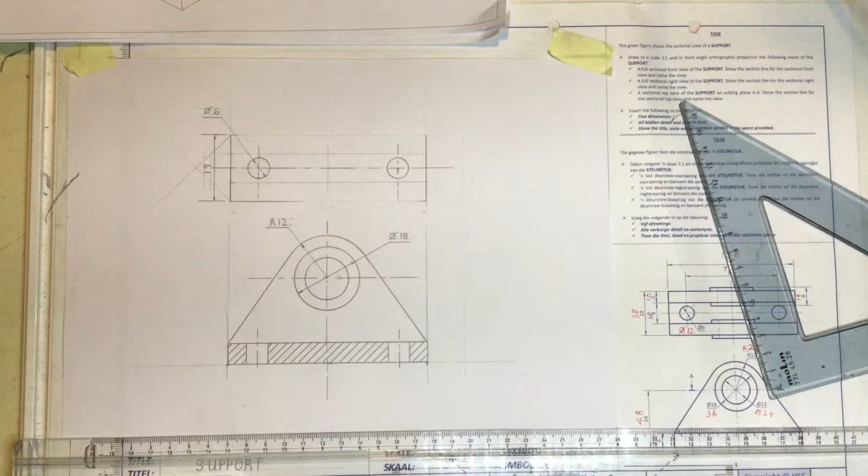Right, part two of this drawing. It's this drawing over here, 610. Just looking at all these views. So far I've drawn the sectional front view. That is completed. I can actually come up here and I can tick it off that I have done that.

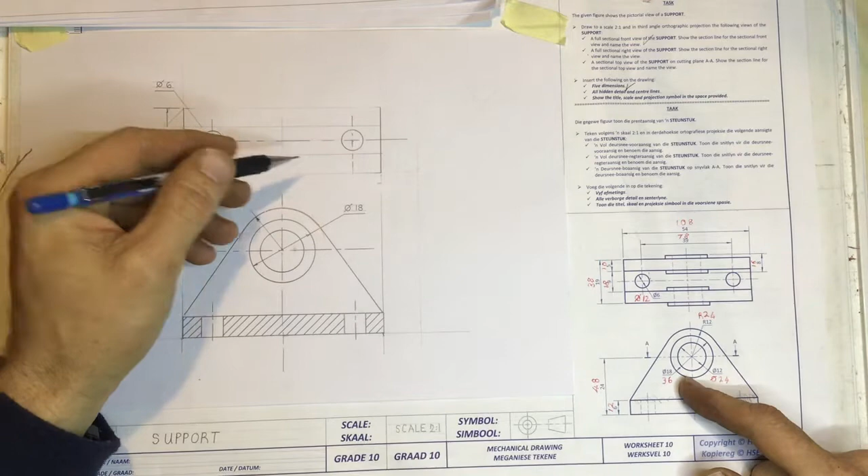I said that I'd done 5 dimensions. I've actually rubbed one out because I drew it a little bit too close over there. I'm going to redo that one somewhere else on the drawing. Okay, what I've also done is I've rubbed out that line and I've rubbed out that line just to make it into a construction line.

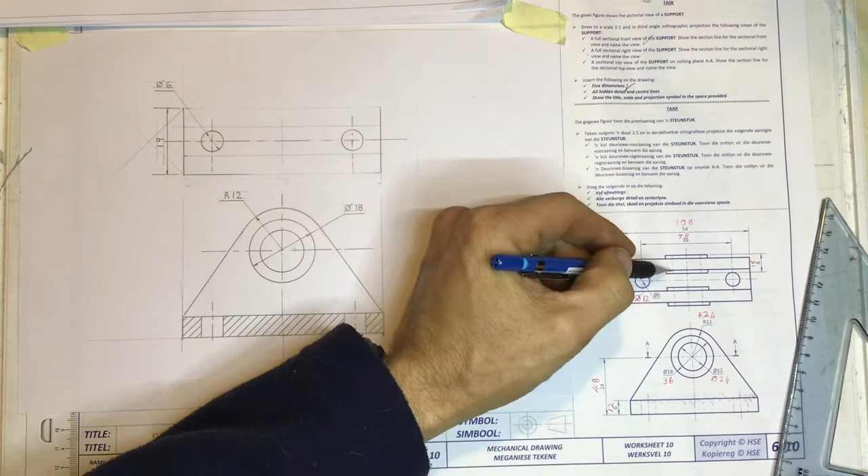The reason being is that we need to look at what this view is going to look like when I section it. Now, you'll see over here on the drawing that these little bits of this sort of bearing stick out over here on that side and that side and that side and that side. You can see the hole as the hidden detail going through it. Now, what does that look like when I cut through it?

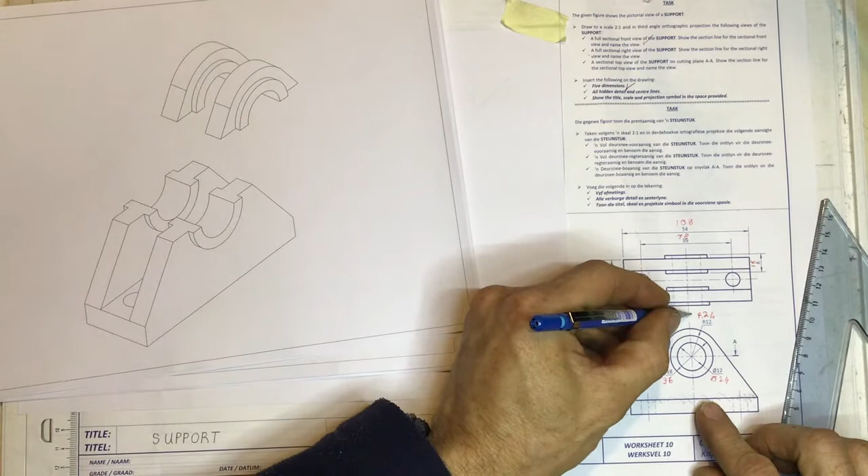I've drawn it out over here as an isometric. You can see there's the cutting line. Okay, you can see that cutting plane over there, AA, standing over here, or a little bird actually flying above it, and that section of it is going to be removed from this whole thing. You can see that nicely done over here, where the top part of this thing has been taken away,

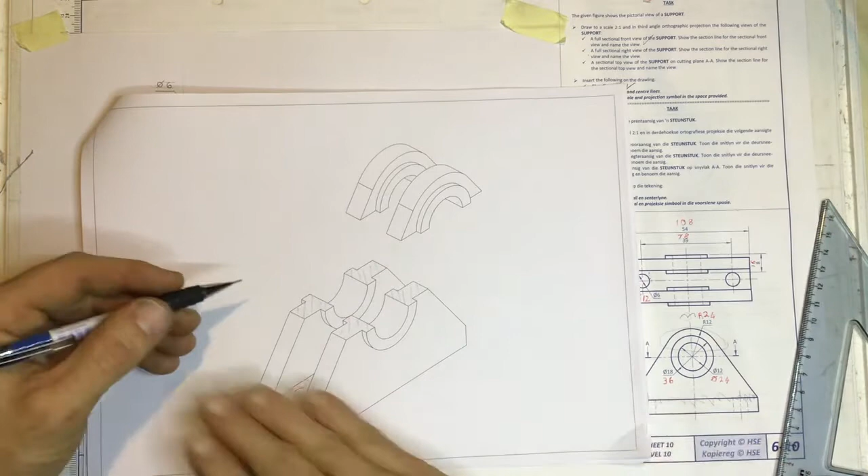and what's going to be left is a cutting plane, which is going to be hatched over here as we did the hatching before. There it is, just hatch that as though we'd taken a saw through that and left the saw blade marks on it. Right, okay, let's have a look and see how we're going to do that.

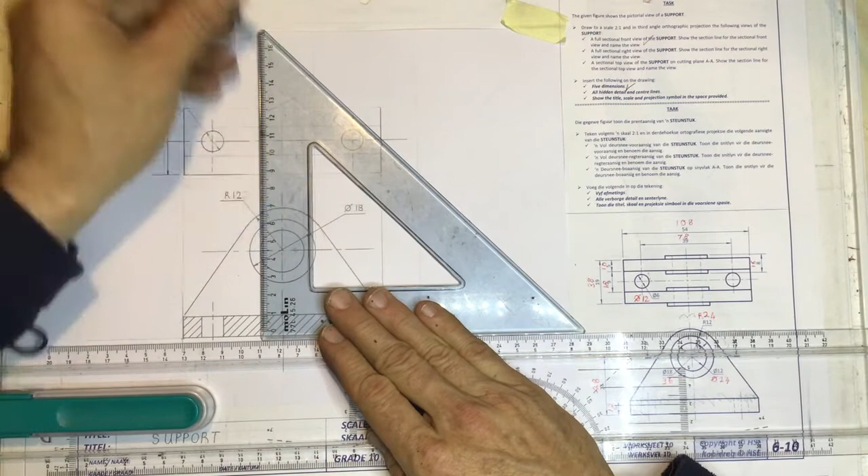Well, I'm going to start out and I'm going to draw in some construction lines coming from my circle. It's always easier to draw the circles first and then draw your construction lines from the circles onto the next view that you're going to need them on. Right, so there we go. There's the circles, okay. And I can draw in those pieces over there. Let's just draw in that.

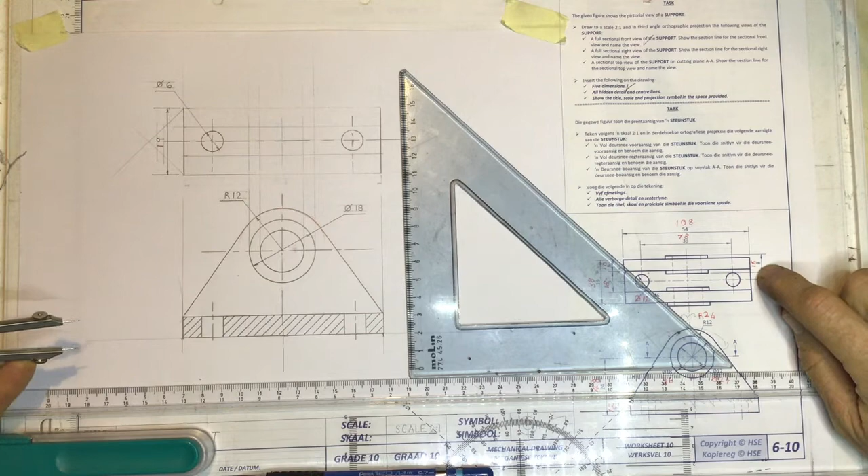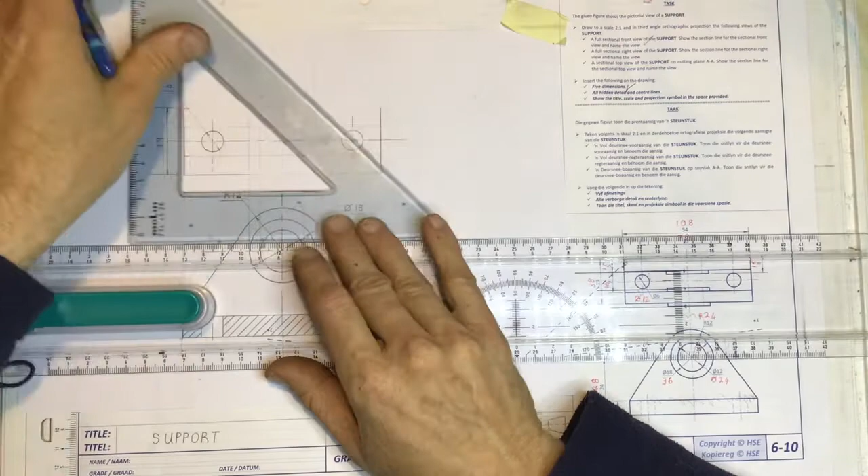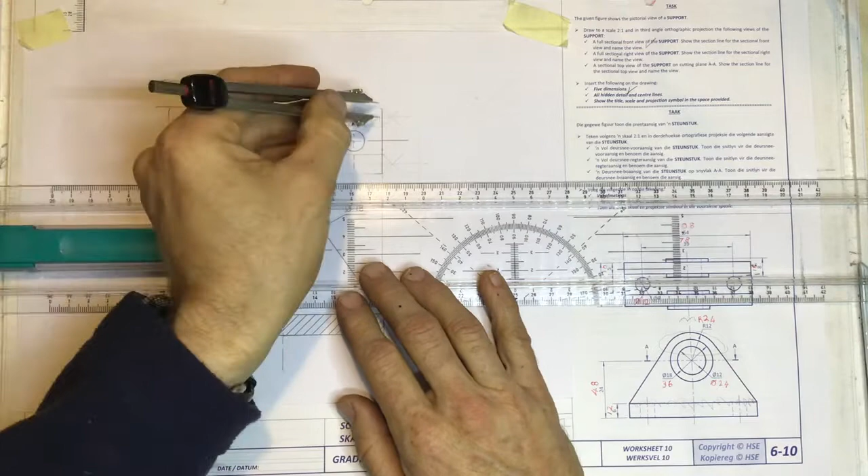Once I've got that, I can draw a little line going across the center of this piece over here. And from that, I'll be able to measure off the 8 millimeters on either side without having to do mental gymnastics. There we go, get my 8. Come over here, measure it off on that side, turn it around, measure it off on that side, go over there, measure it off 8 over there, 8 over there. That gives me 16 millimeters going across there.

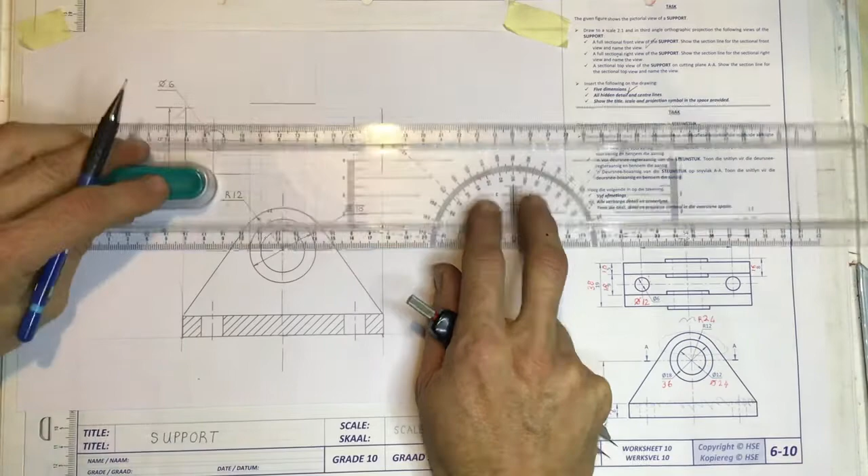And I can now come over here and I can draw a line going across over there, line going across over there, linking it up with that mark that I just made on either side. Come down over here, measure off the 8 millimeters there. There it is, linked up with that mark I just made there, and line going across over there.

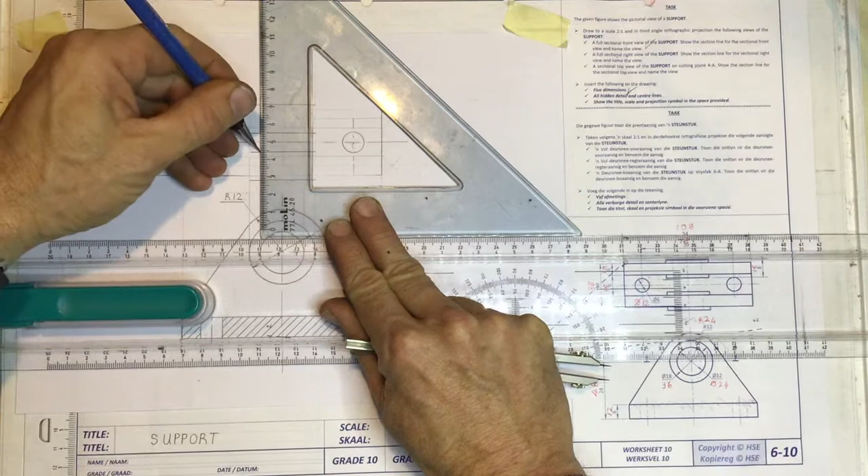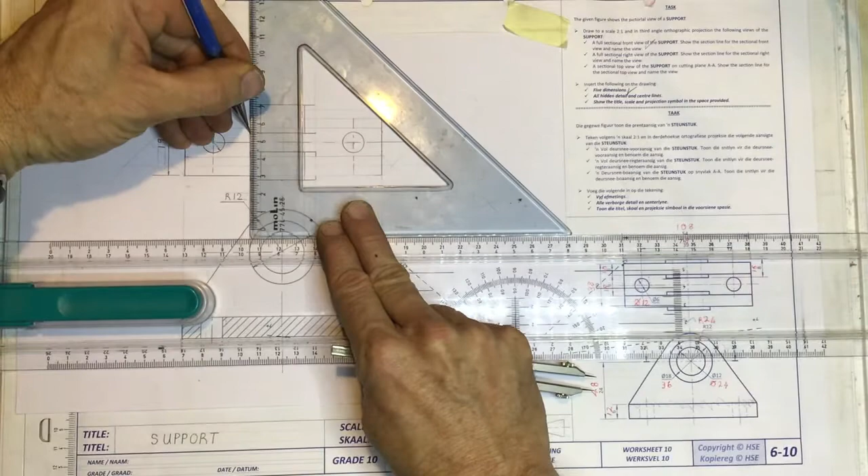Once I've got that in place, I can draw lines going across over here, like that, like that. Draw lines going across like that and like that. I can draw a line coming in over there and over there. I can draw a line coming in over there and over there. Note I'm not going all the way across, just up to the edge over there. There, and there, and there, and there.

And then I need to see where it cut through this part over here. You can see where the cutting plane cut in over there. Let's just have a look at that, you see the cutting plane cutting at that point. Where do I get that?

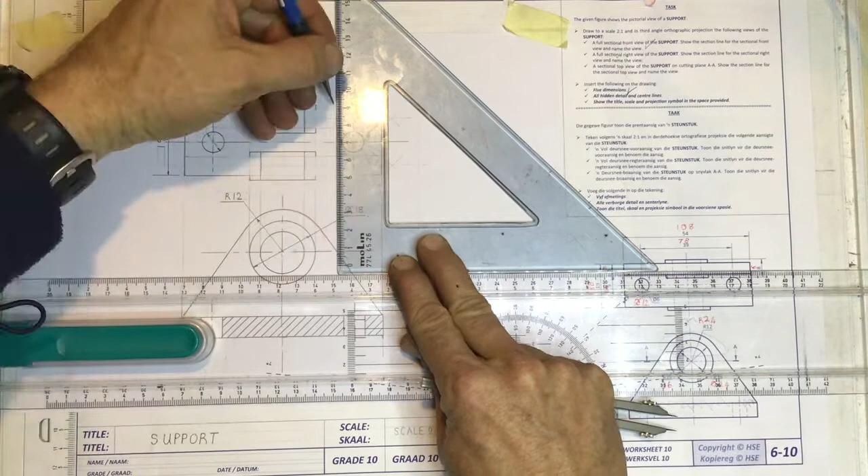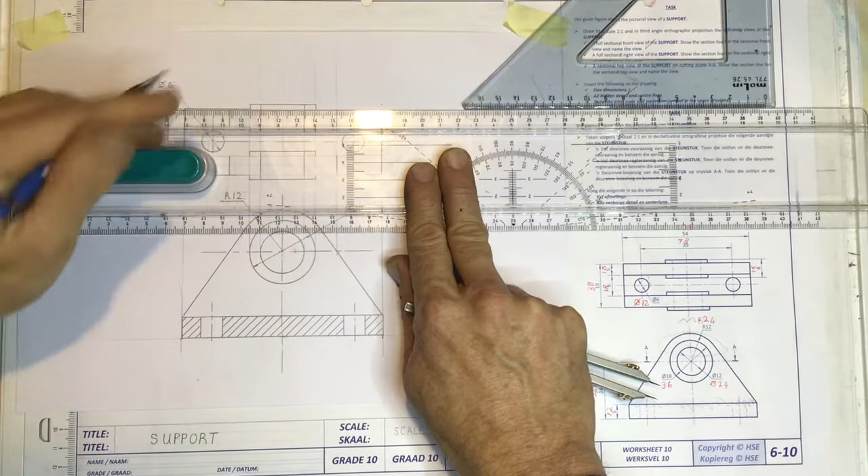Well, where the cutting plane goes through that part, I can draw a construction line going over there, draw a line in over there and over there, come across over here to where the cutting plane cuts over there, and I can draw a line going over there and over there. Finish this off. Let's draw a line going up to that. Draw a line going up to that. Same story there.

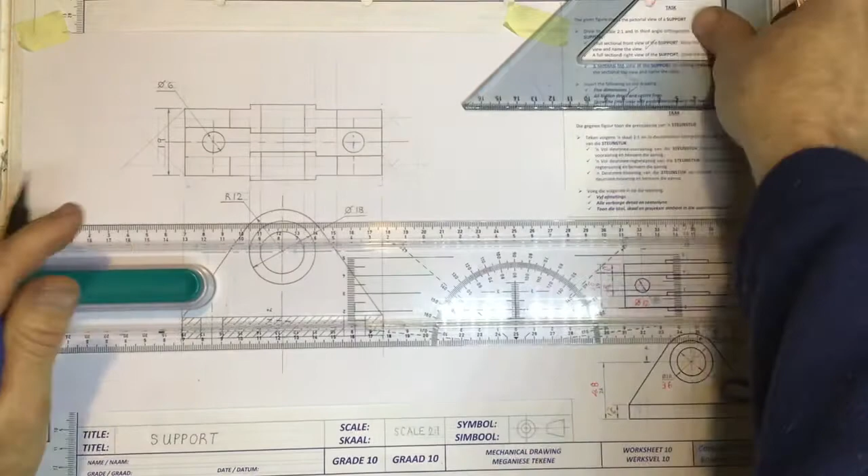Take a line going across from there to there. Take a line going across from there to there. And take a line going across from there to there. Right, once that's in place, I can now do that last little line over there. Sorry. And I can now do the hatching for this thing.

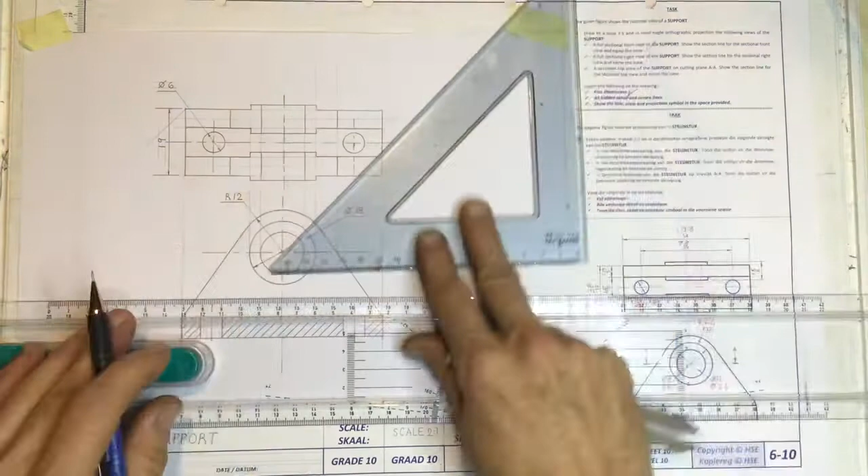Oh yes, lastly, center line. Let's just put a center line in over here for those two circles over there. And I can then do the hatching over here. Let's just do that hatching very, very quickly. There I go. Fast as I can.

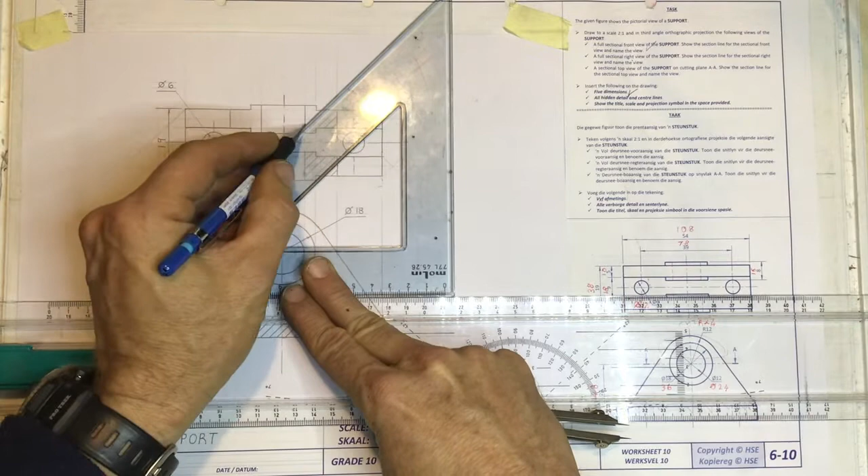Come across here. Let's do that top part over there. Could have probably done that at the same time as doing the bottom. This is starting over here, so let's do that. Try to save moving the ruler as much as you can when you're doing this sort of game.

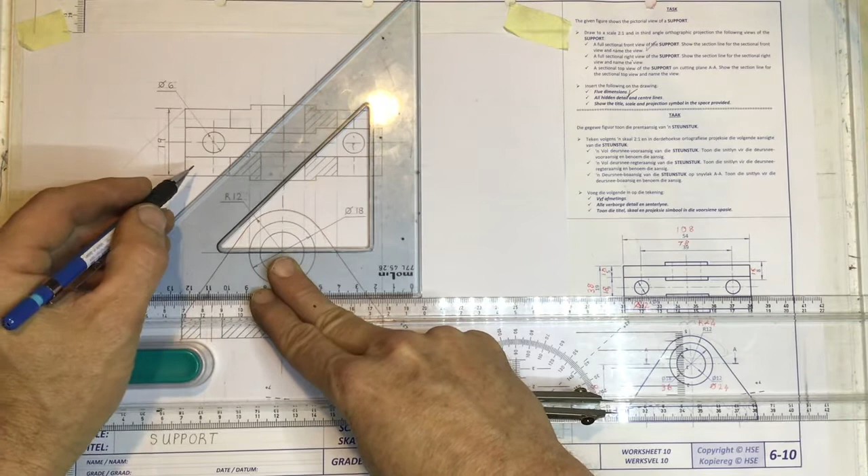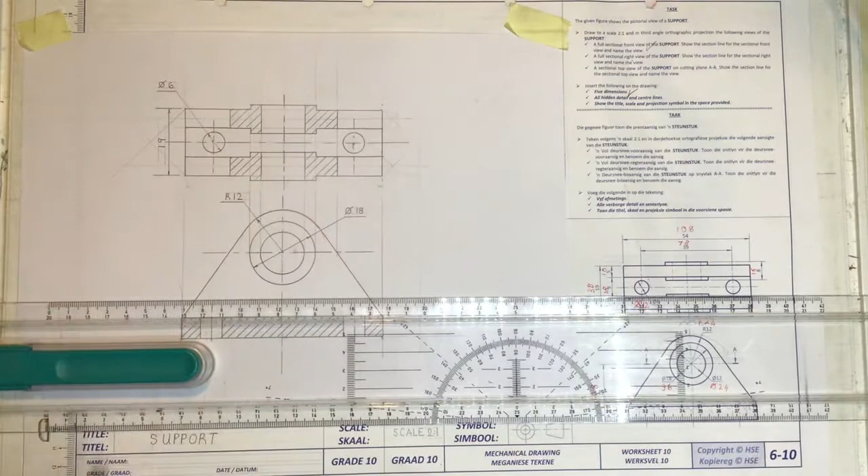And that part is hatched over there. Coming across as fast as we can with our hatching. So you don't want to waste time doing hatching. Right, okay, there we go. There's the top view done. Right. Next thing is to do the right view of this.

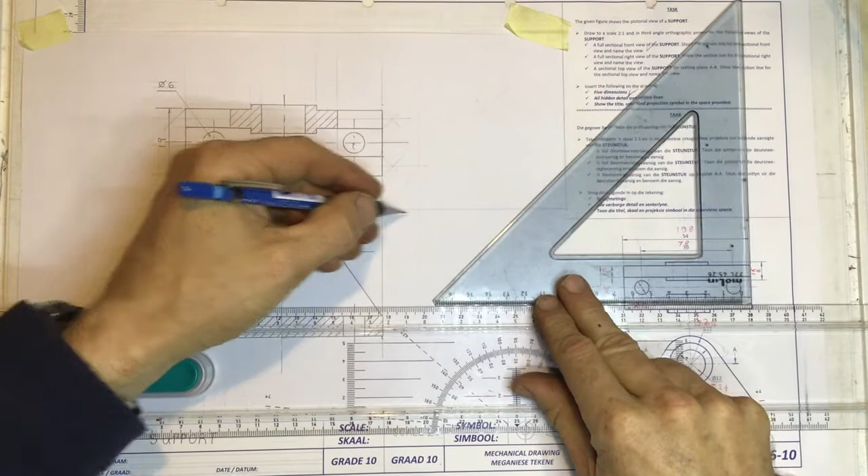Okay, first of all, what I would suggest you do is just draw a construction line going up over there between those two views. Draw a construction line from the top of your front view coming across here. Take a 45-degree line from that intersection of that line and that line. Draw that out over there. Okay, drawn it a bit darker than I normally would just to show.

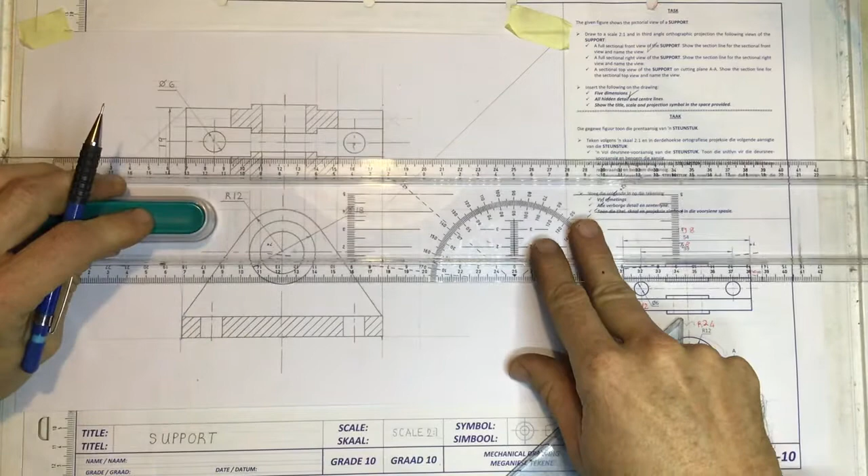Okay, and what I can now do is I can project lines coming across from my top view onto that view over there. From all of these points over here, coming across. See that coming across there. Oops. There we go. Take that over there. All of those lines coming across.

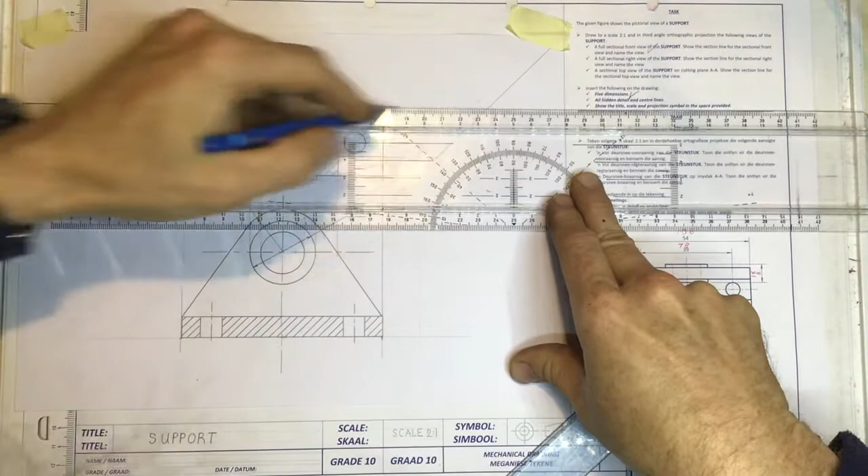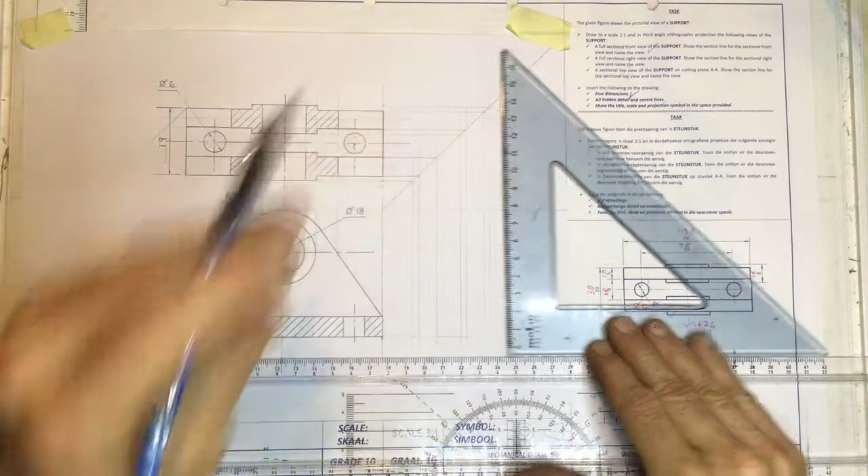Okay, and I can now drop those lines down. There we go. Just link them up as we go. And you'll find that if you've done it properly, you don't need to do any more measurements on this entire drawing. Right, what have they asked you for in this drawing? They're asking you for a sectional right view, okay?

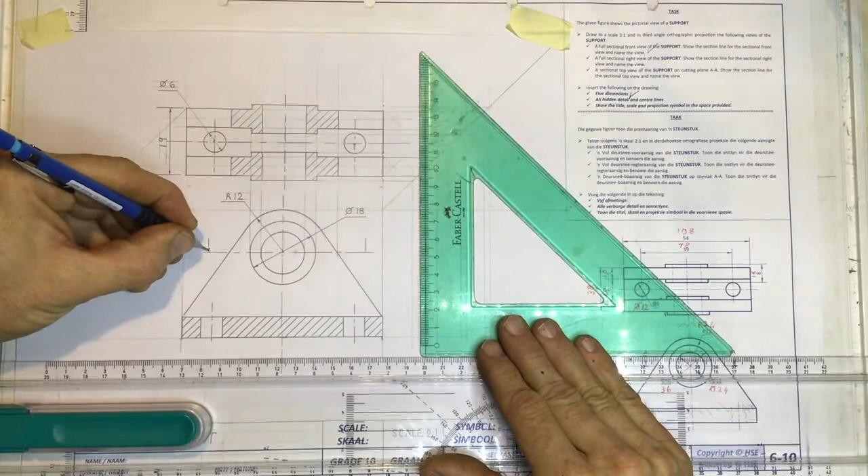I think before I carry on, I'm just going to label this sectional view there. Just put a little line coming down to that center line. Draw in some arrowheads. Okay, should be a little bit longer than your normal arrowheads for your dimensions. Write in an A over there. Write in an A over there, and that would be called top sectional view on AA or something along those lines. You can label that. We'll do the labels a bit later.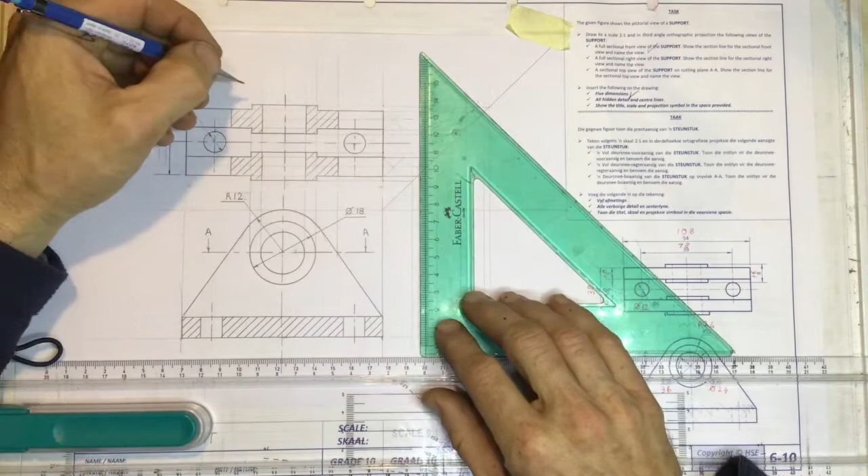Right, let's get on with doing this left view over here. What's my sectional view going to be? Well, I'm going to draw in a little line going like that, little line doing that. Lengthen that a little bit, try and get the same length. Put an arrowhead on there. Put an arrowhead on there. And we're going to call that B. B.

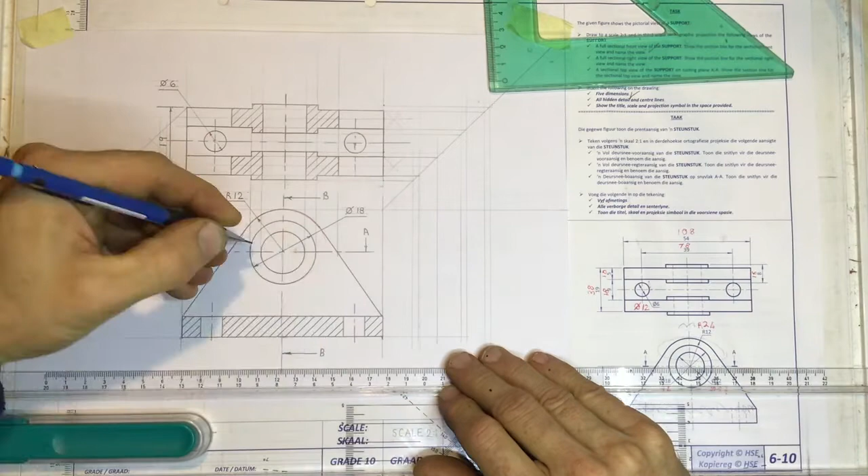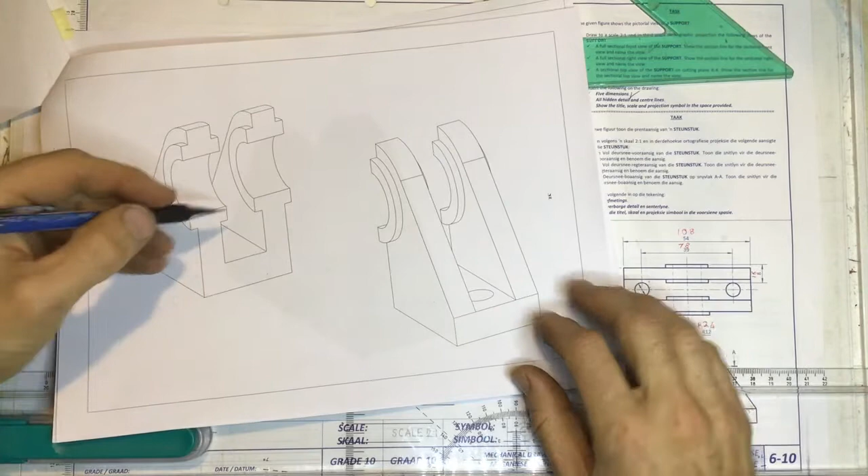All right. Where am I going to be standing? I'm going to be standing over here, looking across at that cutting plane, removing that part of this thing. And what am I going to look at then? Let's have a look. Well, you can see the line that I'm going to be cutting along over there. All right, this part is going to be removed, and I'm going to end up with a view that looks like that, which we can put the hatching in

over here, and you can see where the saw blade is going to cut through this thing when that part is removed. So there it is, that part all hatched. Right, okay, so that's what we need to try and draw as a two-dimensional drawing over here. Okay, so let's take some lines across.

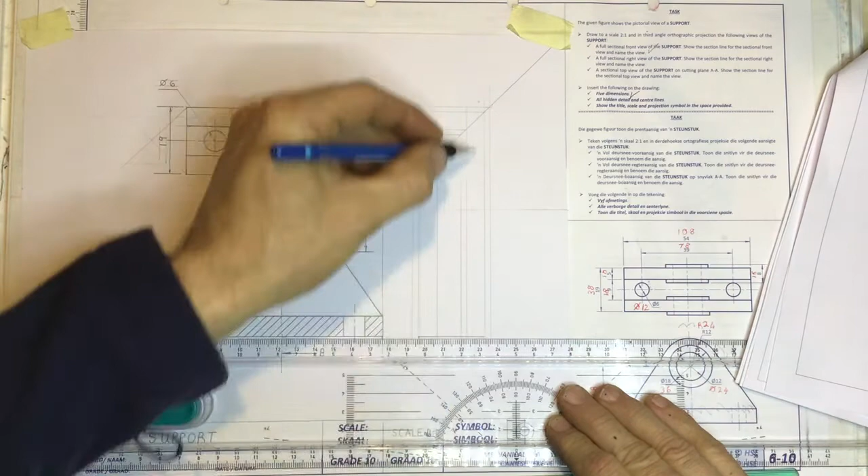First of all, can I see this base? Well, yes, I can. There's the base. It goes from that point. You can see the base over there, traveling down to that point, going across to that point. Okay. Next thing that I'm going to look at is this over here, coming across, coming down, and that going across and coming down. And I can draw a little line going over there.

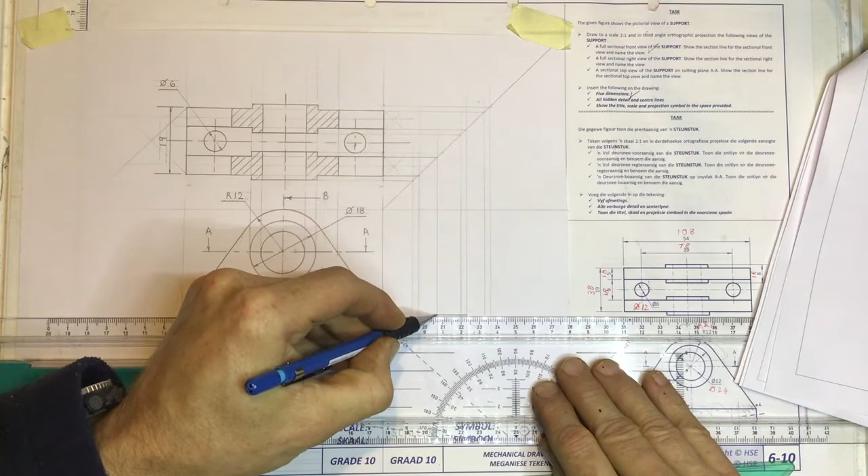Correct, yep, that is it. Good, okay. And once I've got that, I can come up to the top over here. I can draw in a line going over there, and a line going over there. I can come over here to these parts over here.

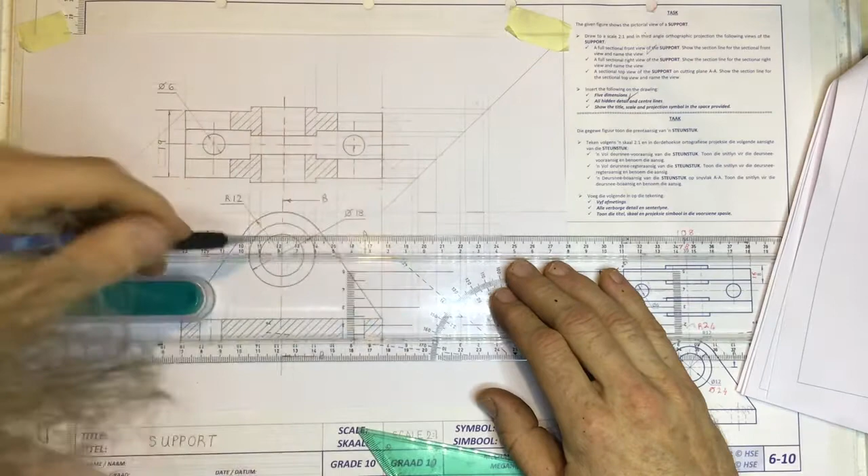From that, from that, from that, you can see how I'm linking these lines that I'm drawing now from these circles. Okay, I'm going to draw a line going over there, over there. Come down over here, I'm going to draw a line going over there, over there.

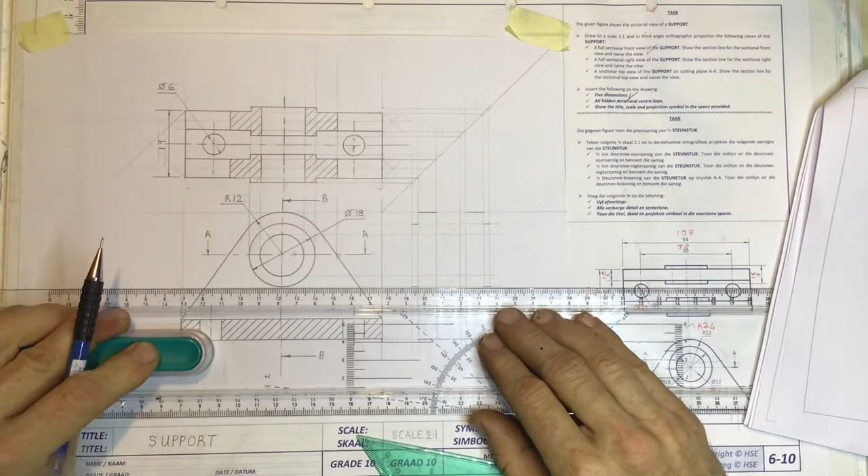Oh, sorry, I've forgotten to draw in that little construction line coming from that point, coming across and down, and from that point coming across and down. And I can draw in these little lines over there, over there, over there, over there. Right, okay, let's get going and draw this thing.

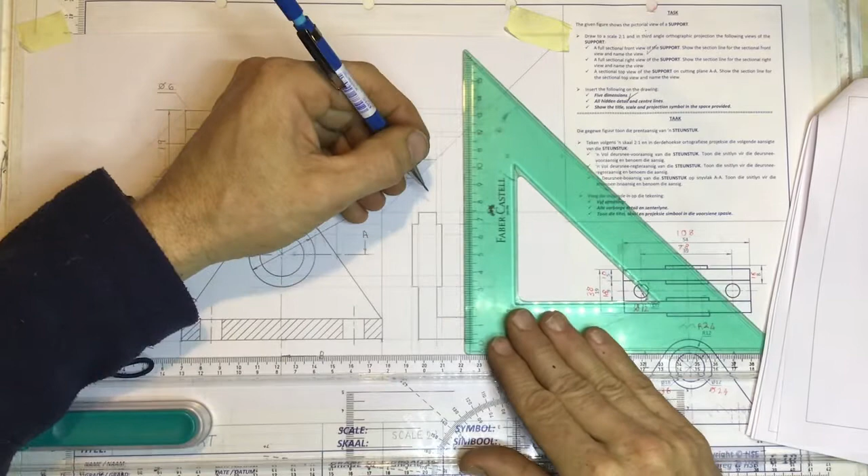Line there, a line there, a line there, a line going all the way down to there, a line going down to there, a line going down to there. Let's come across here, line over there, a line over there, a line over there. Right, and I've got a hole going through this thing, so a line showing the edge of that hole.

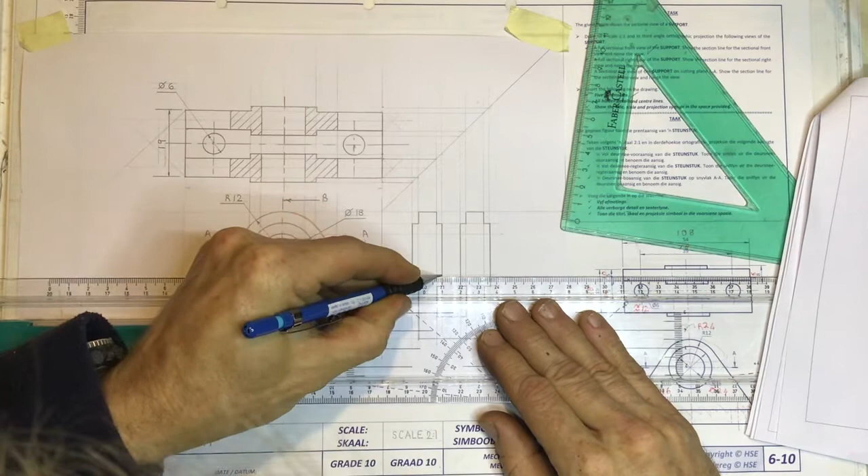I'll show it to you now in the three-dimensional view, so that you can hopefully see what we've got over there. There we go. You can see over here the two pieces at the top, those two over there. And coming down over here, you can see this part over here. That would be that part over there, that little blocky story.

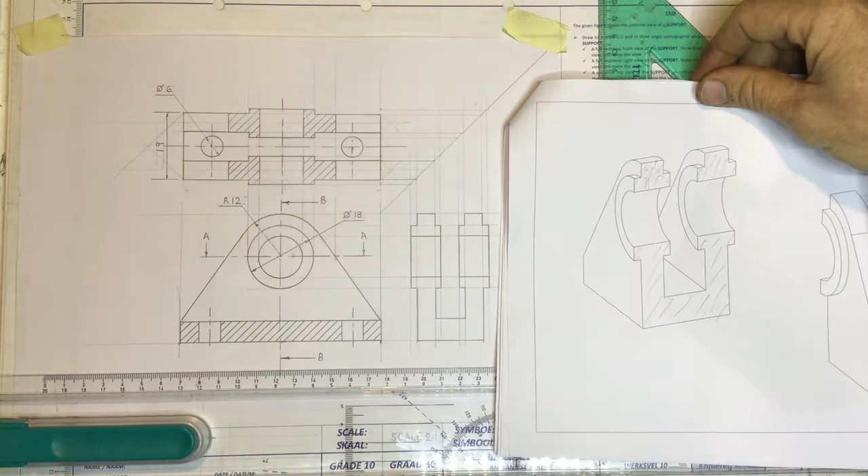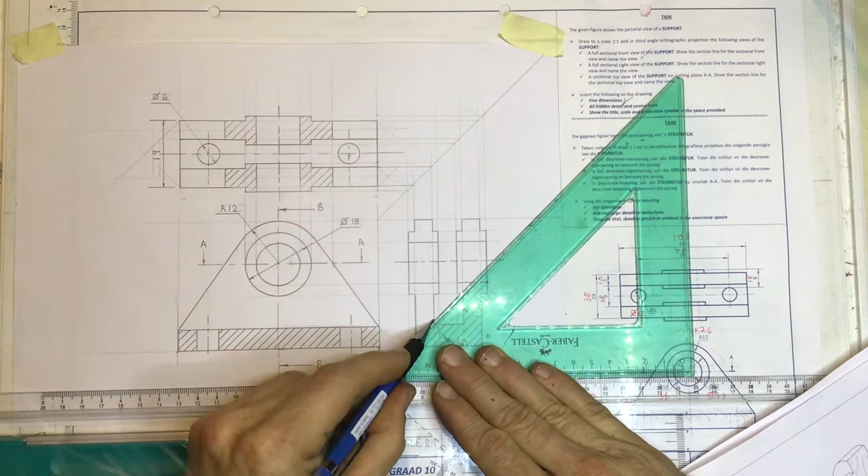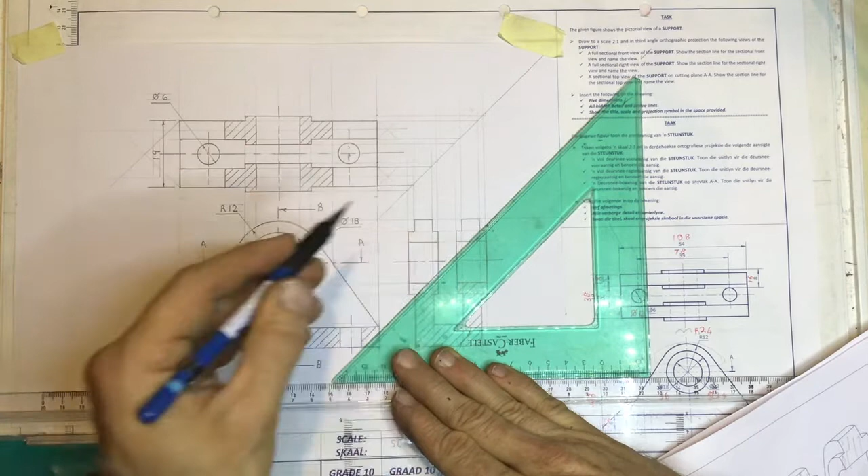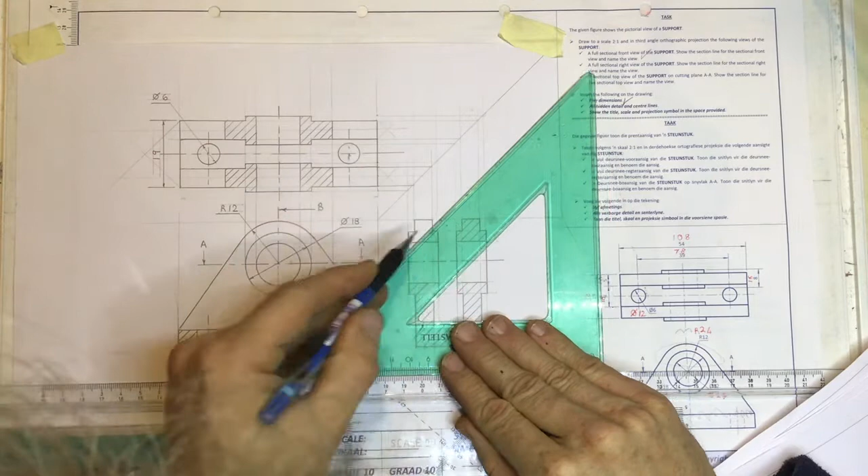Okay, all that I need to do now is to put in a center line and do some hatching. Center line, remember, these are circles. So put those center lines in, don't lose those marks, and put your hatching in as fast as you can. There we go, going across. There we go. There we go, that's all hatched.

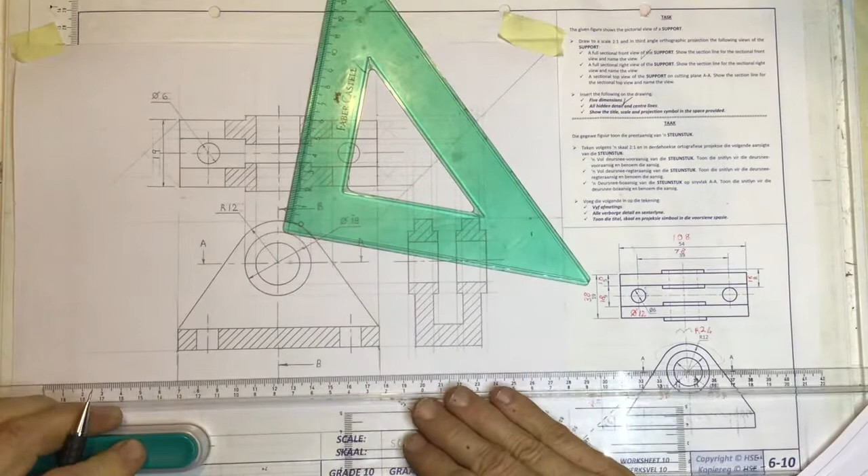I think the last thing that I'm going to do is just to put in that last dimension. What we need is a length over here. Let's pop that in. Let's draw two little extension lines coming up there, line coming across, put your arrows in. These lines that I'm doing now should be done with a 0.3 pencil. Construction line, construction line. Length of this is 54. 54. And there we go.

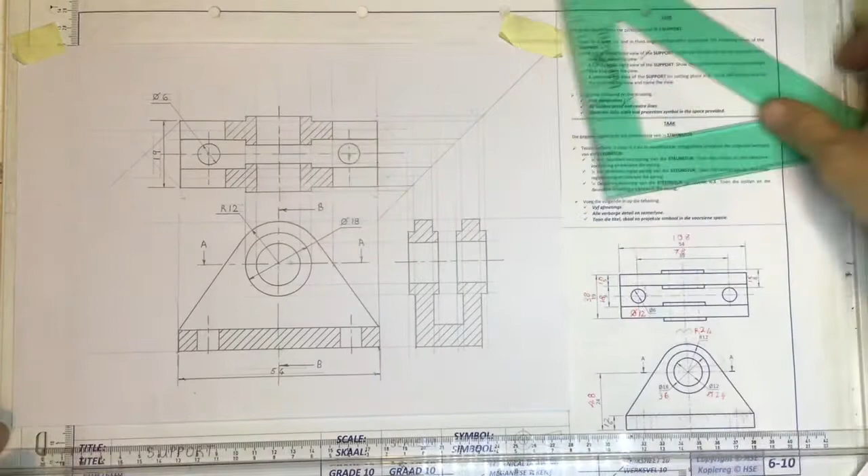That's basically everything that we need. Check. Did I draw a full sectional front view? Tick. Did I draw a full sectional right view? Tick. I can say, yes, I did. Did I draw a full sectional or a sectional top view? Yes, I did. Okay. It also says here, show the section line for the top view and name the view.

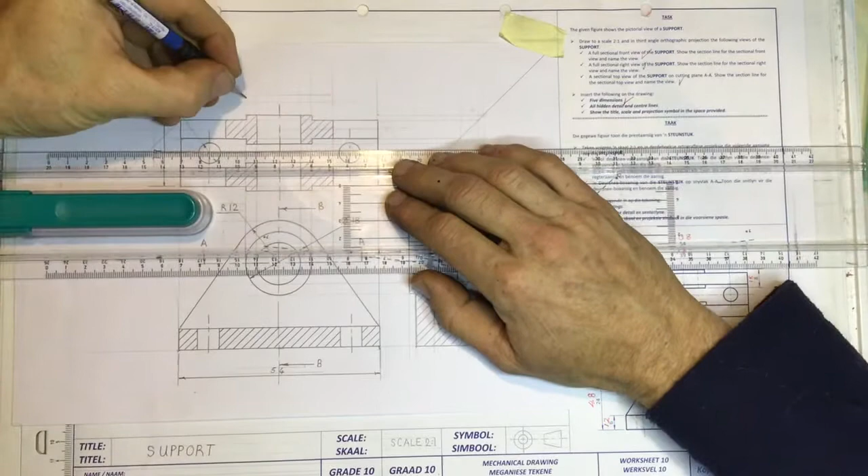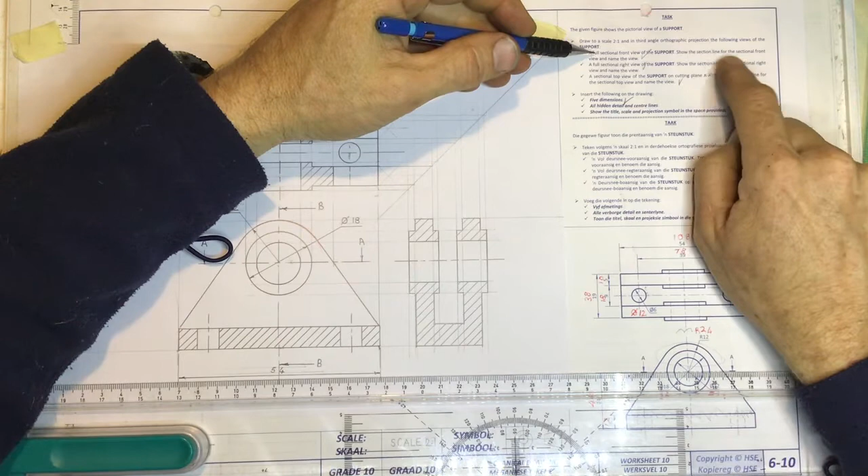Right. So over here, I need to write in somewhere over here, section A-A. Okay, or you could say sectional top view. It says over here, full sectional front view. It says show the section line for the sectional front view. Where would that be? I need to draw that in a little bit.

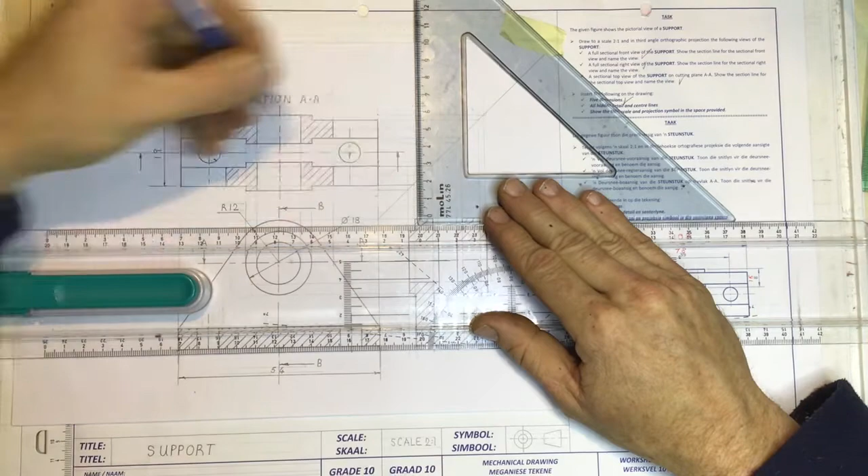Right, let's just extend that out over here. There's a section line. Don't forget to put your arrows on. Let's call that C. Okay, you can see that I've got A, I've got B, and I've got C. Section CC. Okay, it says a full sectional right view. Show the section line for this, and you need to name the view as well.

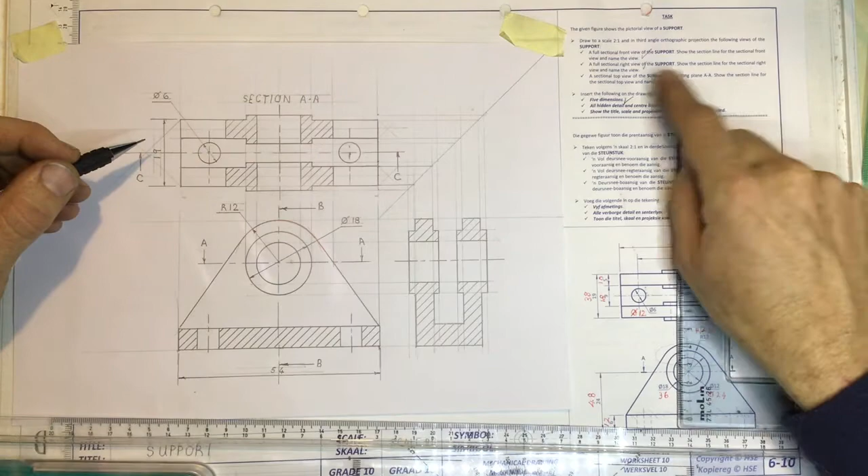So we need to say section, and what was that? BB. All right. Section BB. That's section AA, and this is, they really like you to write this whole story out.

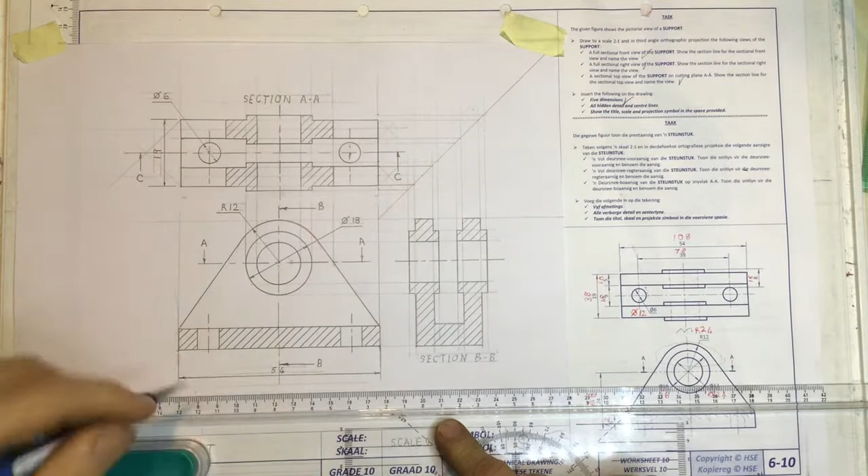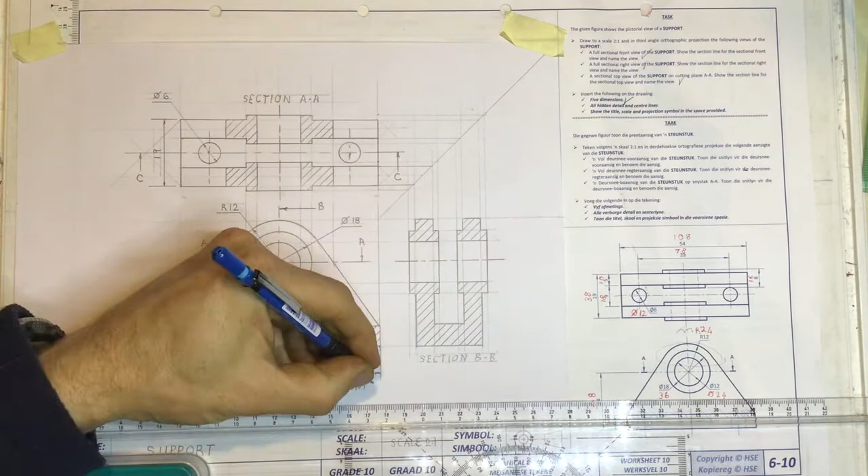Full sectional front view, and I'm going to put C. Right. Okay, there we go. There's our section views. We've put in all the dimensions that we need to. Yeah, I think that's more or less it.

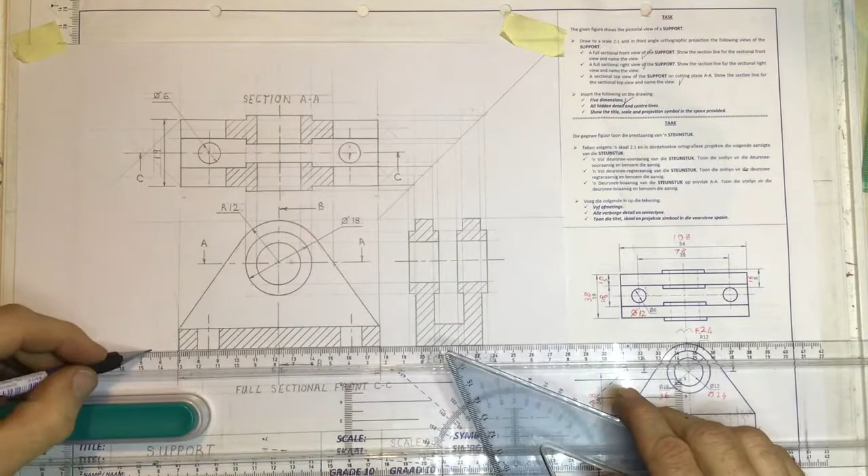When you come to doing your dimensions, little hint there, don't go and try and do all sorts of maths. Just write in the dimensions as you see them, and you can't go wrong with getting the dimensions or the marks for those dimensions. So over here, I've got one that is 24. So let's put in 24, and I can say I've done all of the things.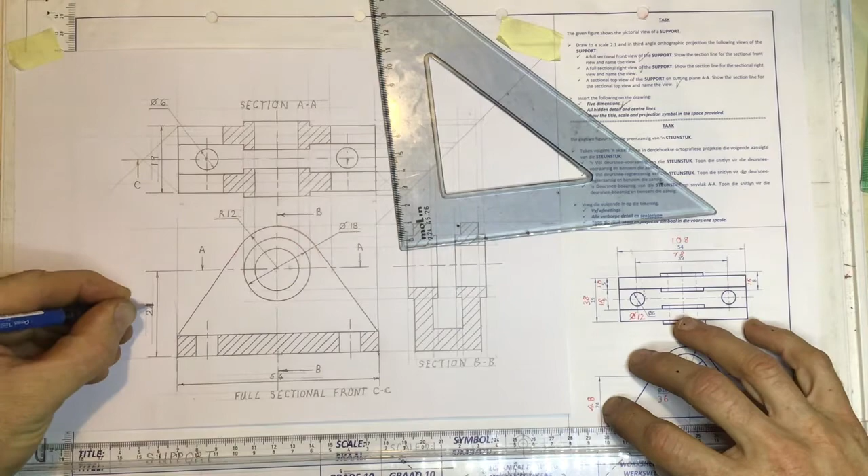Go through this question, tick off as soon as you've done them. 5 dimensions, all hidden detail and center lines. Okay, did we have hidden detail that we needed to put in? Absolutely not, because it is a sectional view. We don't actually put hidden detail, even though there would be hidden detail over here from that hole. But I'm not going to do that.

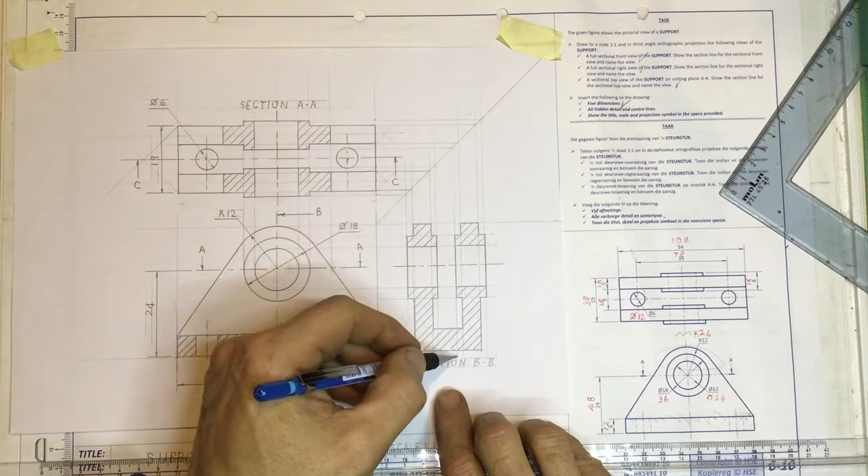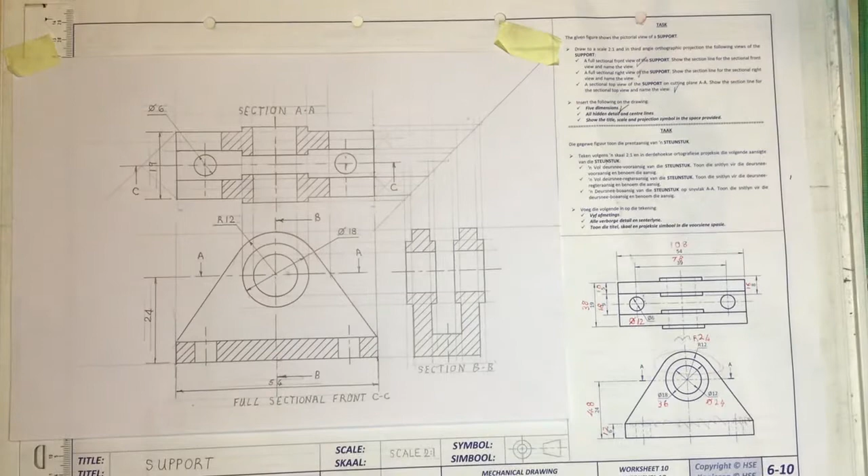What you can do, if you want, you can take a center line coming across here. There's the center line, and you can put in a center line over there just to show that there would be a hole at that point. But you don't need to put hidden detail. It's a sectional view, and we don't put hidden detail onto sectional views. Right, there's the drawing. I hope that helped.